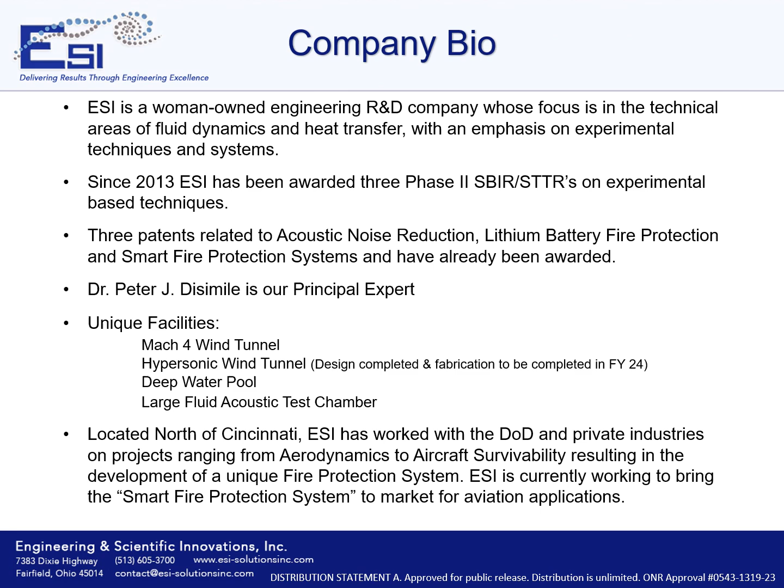Over the years, we have had the privilege of collaborating with the Department of Defense, DoD, as well as many esteemed private companies on an extensive array of projects encompassing a diverse range of disciplines, from aerodynamics to aircraft survivability, resulting in the development of a unique fire protection system. ESI is currently working to bring the Smart Fire Protection System to market for aviation applications.

The current challenge is to develop a high-speed, high-resolution shear stress measurement system that can be used to quantitatively measure the full field shear stress distribution on surfaces in hypersonic flows. Currently, only point measurements are able to be made. The capability to acquire stress levels over a large surface area will enhance both the Navy and the DoD's ability to design and test hypersonic vehicles.

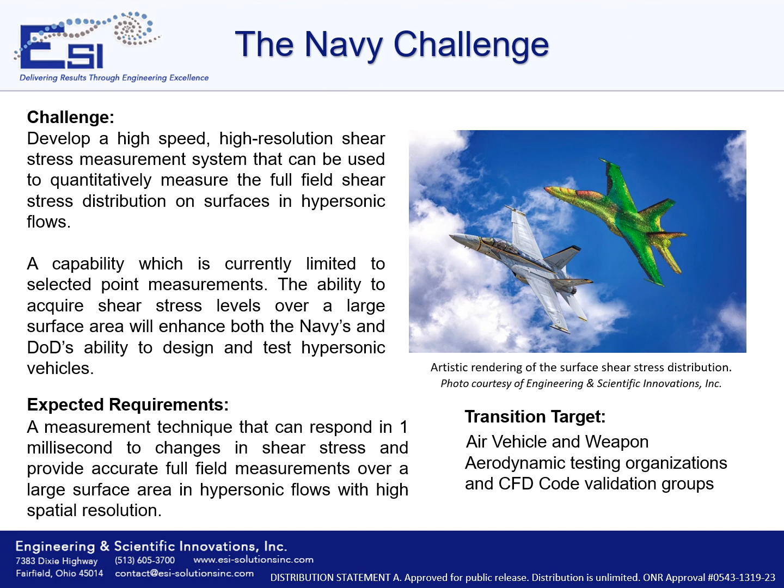Understanding the shear stress distribution over a surface is a driving factor of all fluid dynamic analysis for aircraft design. Although CFD can be used to compute shear stress and provide insight over an entire vehicle surface, accurate experimental data must be available to first validate the necessary models employed within the CFD simulations, which to date is only limited to a few point measurement locations. While there are experimental visualization techniques that can be used to qualitatively infer the shear distribution over an entire vehicle surface, quantification of the acquired data has been unsuccessful to date.

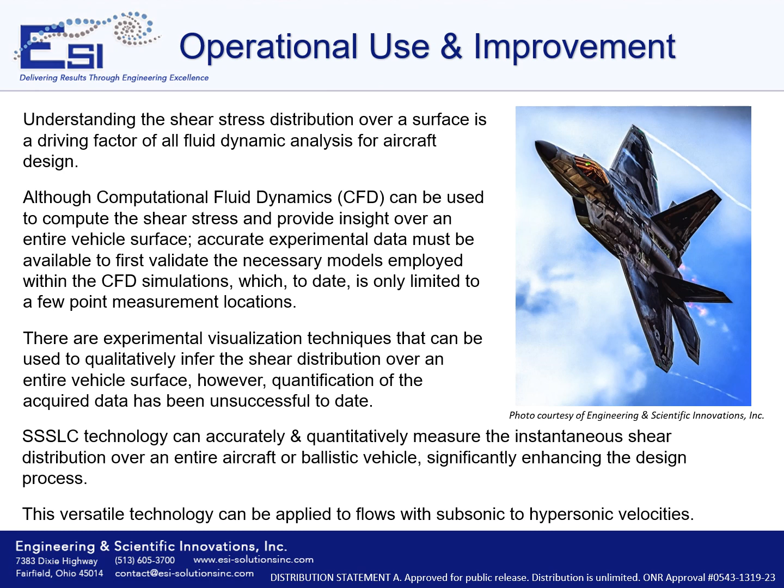Shear stress-sensitive liquid crystal technology can accurately and quantitatively measure the instantaneous distribution over an entire aircraft or ballistic vehicle, significantly enhancing the design process. This versatile technology can be applied to flows with subsonic to hypersonic velocities. Shear stress-sensitive liquid crystals change color when subjected to a shear force. To date, this technology has been previously used to qualitatively visualize the shear distribution over various three-dimensional or non-flat surfaces.

ESI has developed a method for calibrating liquid crystals so that the resulting color change experienced by a liquid crystal film when exposed to a shearing force can be quantitatively correlated. Using this technology, ESI is capable of quantitatively measuring the shear stress distribution over an entire surface for a wide range of flow regimes with a time response of less than 1 millisecond and a spatial resolution of less than 1 micron, or as accurate as the camera being used.

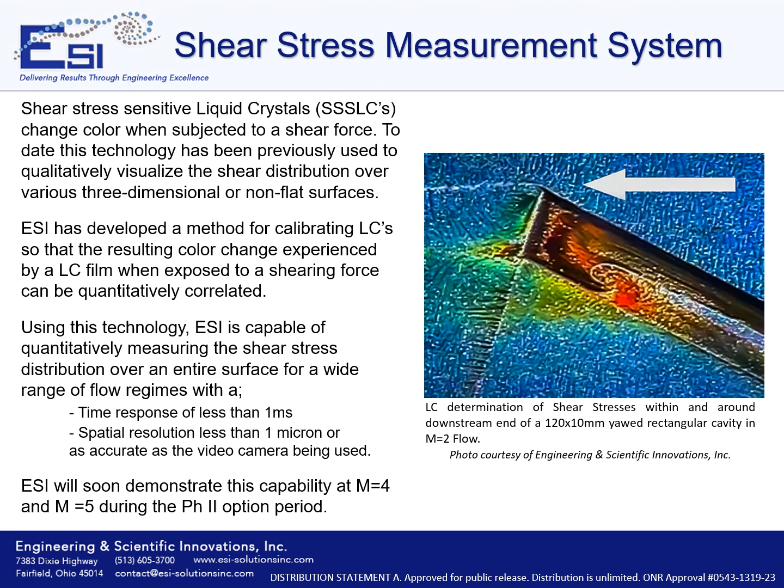ESI will soon demonstrate this capability at Mach 4 and Mach 5 during the Phase 2 option period. The image included on this slide shows the liquid crystal determination of shear stresses within and around the downstream end of a 120 by 10 millimeter yawed rectangular cavity in Mach 2 flow.

While liquid crystals are incredibly unique and beautiful in their own right, they also provide us with a one-of-a-kind insight to an understanding that we've never had before. Non-encapsulated liquid crystals are shear stress sensitive and exhibit the ability to reflect light at wavelengths, color, dependent on the applied shear stress. It's incredibly advantageous that the shear stress-sensitive liquid crystals can non-intrusively be used to determine the full field surface shear stress distribution.

ESI has developed an apparatus for calibrating the emitted color to a known shear force. Using high-speed digital imaging, ESI has successfully shown that the liquid crystals exhibit the temporal and spatial resolution for hypersonic applications. The use of such a technique will provide improved data relating to boundary layer transition on wings and surfaces of missile platforms, skin friction anomalies on high-speed platforms, rotary wing aircraft, highly maneuverable fixed-wing aircraft, as well as assessing vehicle-machine performance.

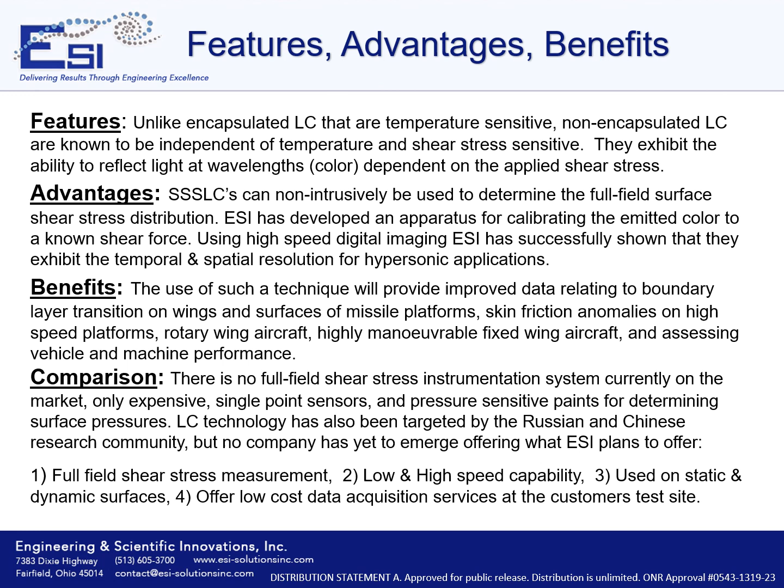There is no full-field shear stress instrumentation currently on the market, only costly single-point sensors and pressure-sensitive paints for determining surface pressures. It is known that liquid crystal technology has also been targeted by Russian and Chinese research communities, but no company has yet to emerge offering what ESI plans to offer: full-field shear stress measurements at low and high-speed capabilities on both static and dynamic surfaces, as well as low-cost data acquisition services that can be performed at the customer's test site.

Our schedule for the Phase 2 option starts with calibrating the shear stress-sensitive liquid crystal, the completion of the Mach 5 design, and then its fabrication. Once the tunnel is finished, we will then calibrate the shear stress-sensitive liquid crystal in the Mach 5 tunnel. With reporting throughout, we will finish with a laboratory demonstration of the Mach 5 wind tunnel and shear stress-sensitive liquid crystals.

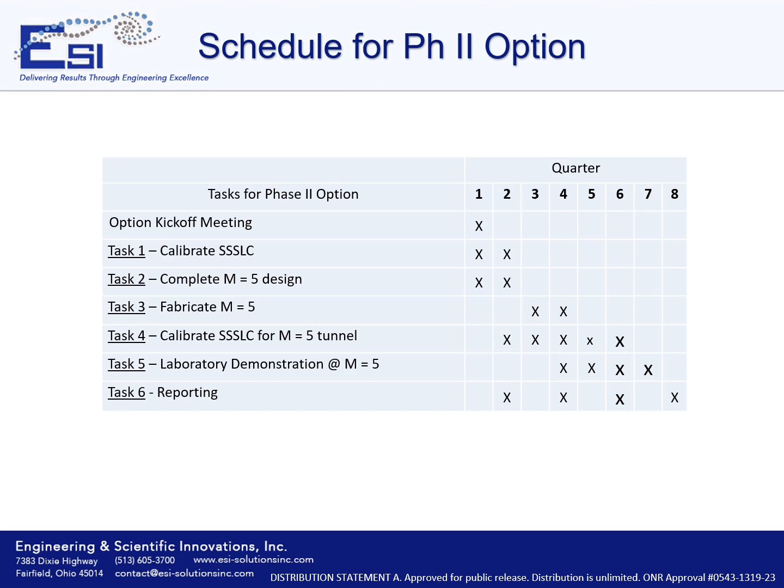The current shear stress-sensitive liquid crystals are being provided by Hallcrest, a chemical company now owned by SpotSee. Since Hallcrest SpotSee does not have the aerodynamic expertise, the development of targeted shear stress-sensitive liquid crystal viscosity ranges was never a focus, but instead they covered a full spectrum of viscosities and therefore speed ranges. Optimizing shear stress-sensitive liquid crystal performance by adjusting their viscosity range would take place during the Phase 2 option. Discussions with Hallcrest SpotSee indicate that either they would directly modify the liquid crystal formulation or provide ESI with raw shear stress-sensitive liquid crystal and thereby enable ESI to fine-tune the formulation.

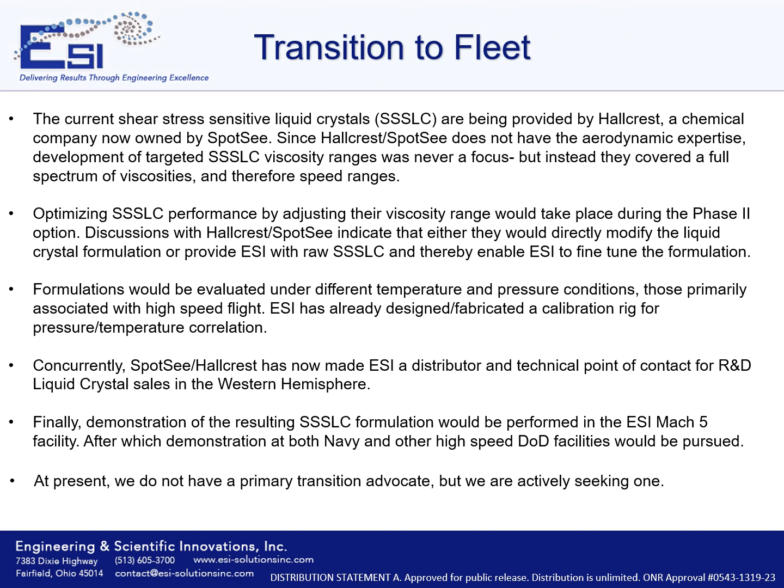Formulations would be evaluated under different temperature and pressure conditions, those primarily associated with high-speed flight. ESI has already designed and fabricated a calibration rig for pressure and temperature correlation. Concurrently, SpotSee Hallcrest has now made ESI a distributor and technical point of contact for research and development liquid crystal sales in the Western Hemisphere. Finally, demonstration of the resulting shear stress-sensitive liquid crystal formulation would be performed in the ESI Mach 5 facility, after which demonstration at both Navy and other high-speed DoD facilities would be pursued. At present, we do not have a primary transition advocate, but we are actively seeking one.

As a high-tech RD, T&E company, we recognize that not all programs and organizations have the capital resources necessary to purchase the latest instrumentation or the manpower to operate and maintain the level of expertise needed to fully utilize any given technology. So ESI offers a two-prong approach with its customers. 1. A measurement system can be purchased outright, and ESI will provide the necessary training and technical support, or 2. ESI can come into a test environment and set up the necessary instrumentation, perform the test, acquire data, and analyze the data. Once the shear stress-sensitive liquid crystal system is finalized, this capability would be offered to the Navy and other DoD organizations, as well as commercial entities such as the Sikorsky Aircraft Company, Boeing, etc.